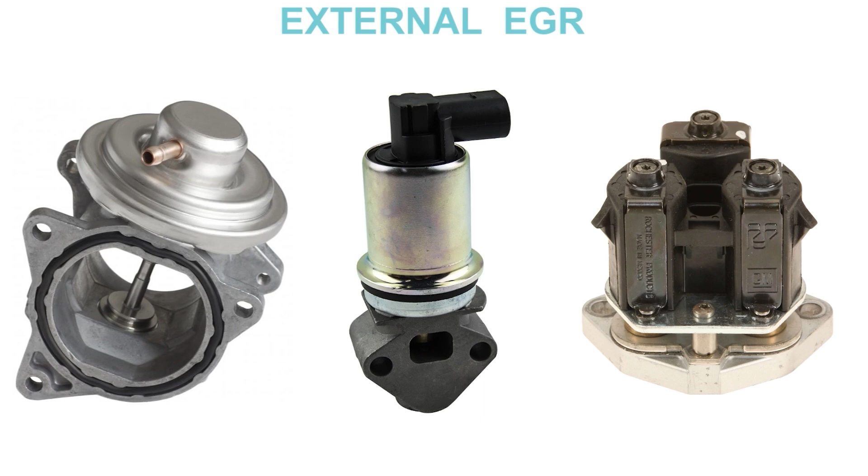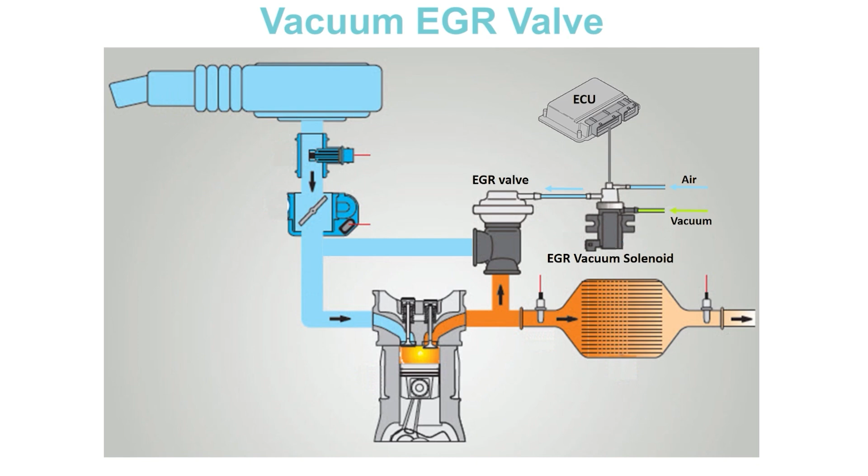There are three different types of external EGR systems. The oldest type is a vacuum-controlled EGR. It consists of a vacuum valve and an electromagnetic valve. The engine control unit of the engine, through the electromagnetic valve, controls the operation of the vacuum valve, which opens

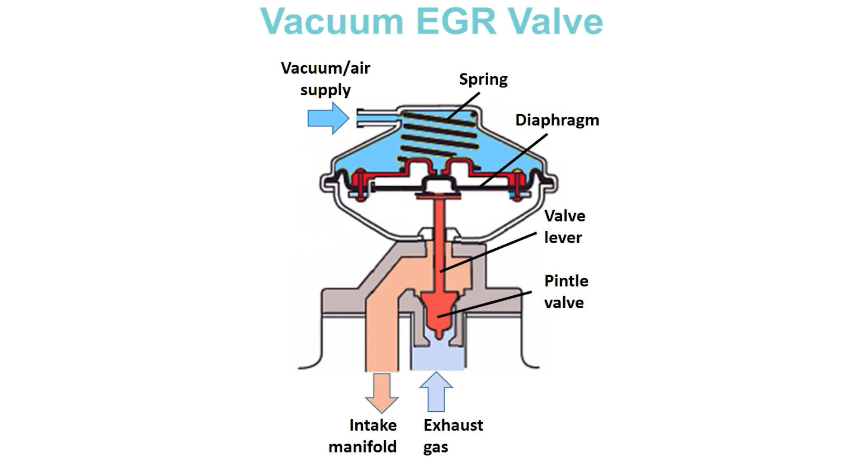and closes the exhaust gas flow into the intake manifold. The vacuum-controlled EGR valve contains a membrane that separates two chambers. If necessary, a vacuum or external air is supplied to one chamber from the electromagnetic valve, which acts on the diaphragm together with the spring. A valve lever is attached to the other end of the diaphragm. At the lever end is a pintle valve for closing the exhaust gas recirculation channel.

When there is outside air in the upper chamber, it together with the spring pushes the diaphragm and closes the EGR valve. By creating the conditions for the EGR valve to open, the engine control unit supplies voltage to the solenoid valve, which is switched to the position to pass the vacuum. A vacuum enters the upper chamber instead of outside air. Due to the weaker pressure, the diaphragm rises and opens the valve for the exhaust gas flow.

When the conditions for exhaust gas recirculation are disrupted, the engine control unit power supply is cut off. The solenoid valve switch closes the vacuum supply and allows outside air into the vacuum valve. Pressure rises in the upper chamber. Higher air pressure pushes the diaphragm and closes the valve, stopping the exhaust gas flow to the intake manifold.

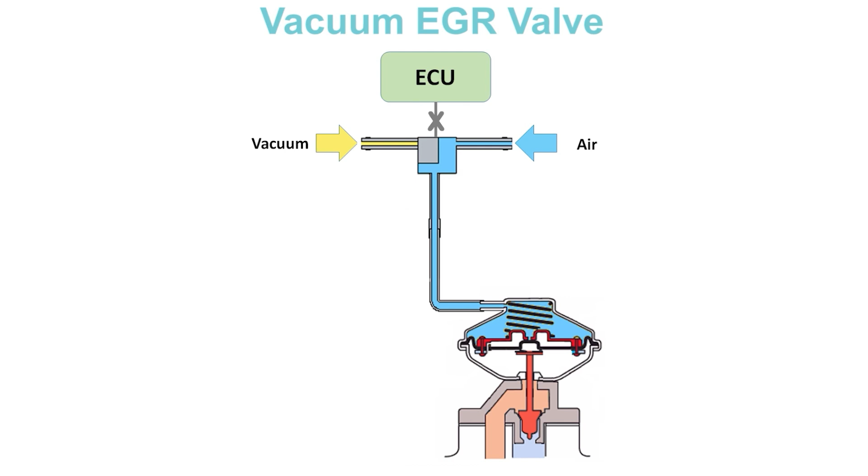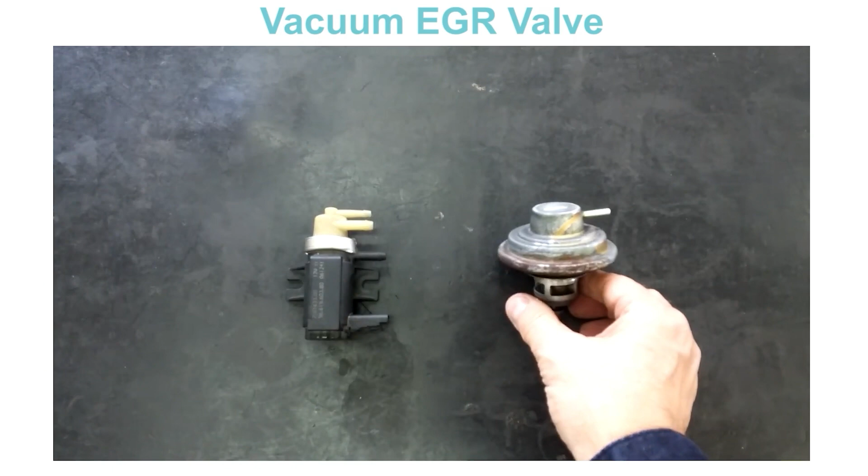So, when a vacuum is supplied from the solenoid valve, the EGR valve is open and we have exhaust gas recirculation. When outside air is supplied, the EGR valve is closed, and we have no exhaust gas flow into the engine intake manifold. The disadvantage of the vacuum EGR valve is that it only has two states, open and closed. Thus, there is no possibility of regulating the exhaust gas flow between these two states.

Another type is electric, linear EGR valves. They can regulate the amount of exhaust gas, making them more suitable for more precise and comprehensive recirculation control. It is a single device that contains an electric drive and a valve. There are two types, electromagnetic and with a stepper motor.

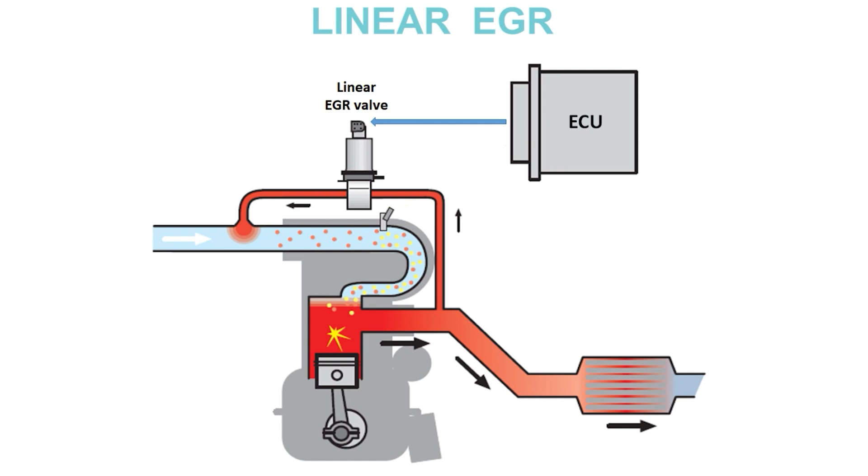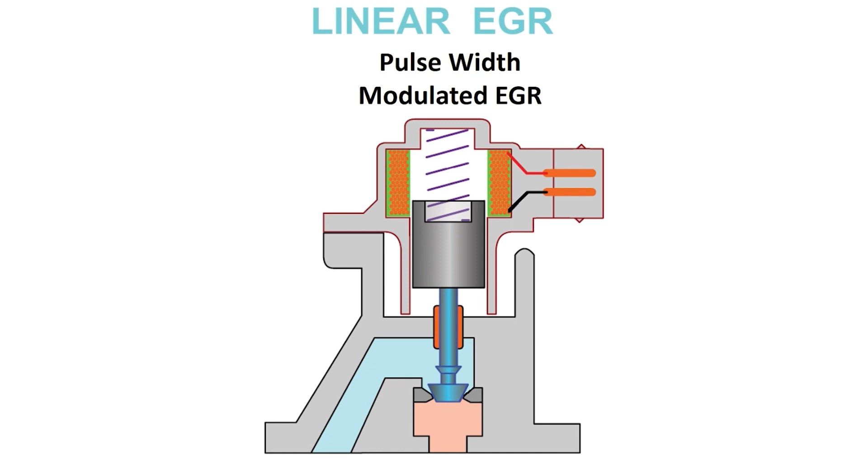With the electromagnetic EGR valve, a spring closes the valve. The valve armature is outside the electromagnet. When power is applied to the coils of the electromagnet, a strong magnetic field is created inside the solenoid coil that pulls in the armature, compressing the spring. Then the EGR valve is open.

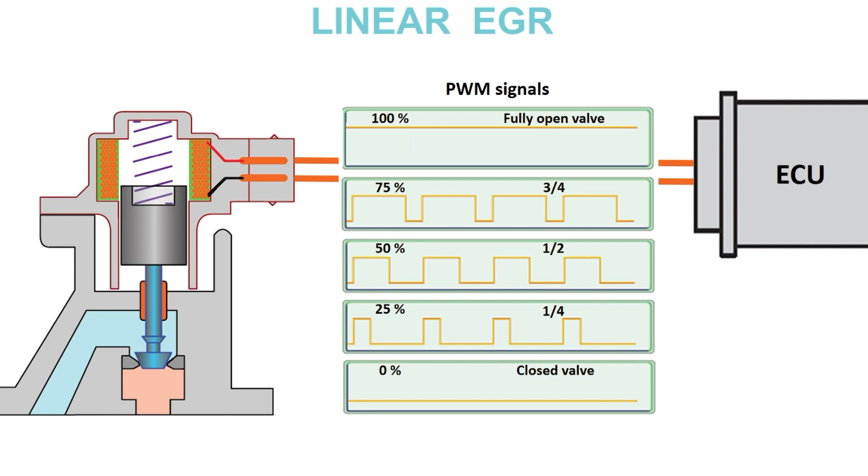The solenoid valve is powered by PWM signals from the engine control unit via a 2-pin connector. The longer the opening period of the PWM signal, the stronger the magnetic field and the more the valve opens. When there is no power, the spring closes the EGR valve.

With the second type of linear EGR valve, positioning is done using a stepper motor. The valve opening is in steps. The stepper motor is powered from the engine control unit via a 3-pin connector. Depending on the combination of the power supply of the different coils, the electric motor rotates and takes an appropriate position. By rotating the armature, the valve opens and closes in steps.

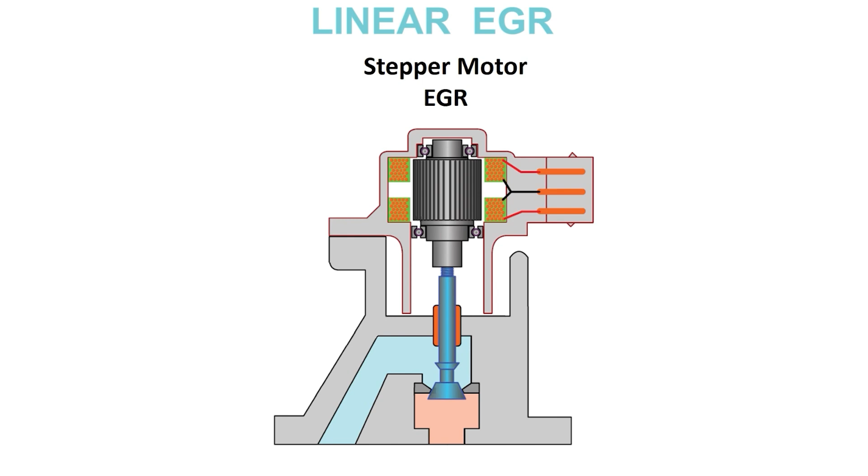With the first EGR valves, the engine control unit had no feedback on whether exhaust gas recirculation had occurred. Service technicians often close the return line, and no matter that the ECU opens the EGR valve, there is no exhaust gas flow. That is why the legal regulations were tightened, which required control of the correctness of the EGR system by the engine control unit.

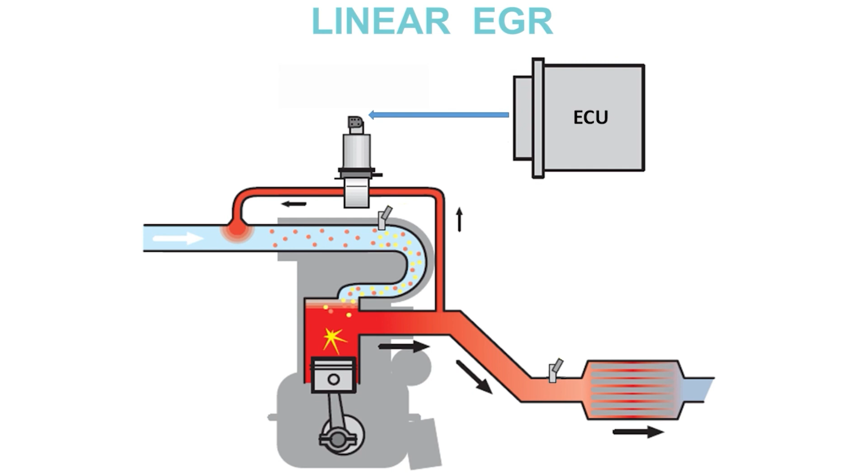Manufacturers have solved this requirement by adding control functions of pressure analysis in the intake line through the MAP sensor, analyzing the signal from the oxygen sensor, and installing a valve position sensor in the EGR. Now the ECU can control the correct operation of the EGR valve and the performed exhaust gas recirculation.

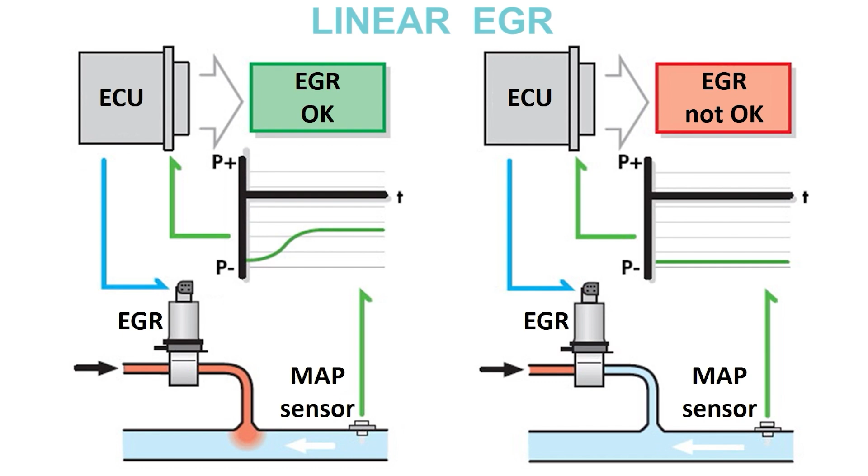The ECU detects any blockage, disconnection, or failure of the EGR system. It stores an error code, turns on the malfunction indicator lamp, and the engine runs with a limited maximum number of revolutions because the exhaust gas emission is increased. This limited engine function allows the driver to take the vehicle to a car repair shop.

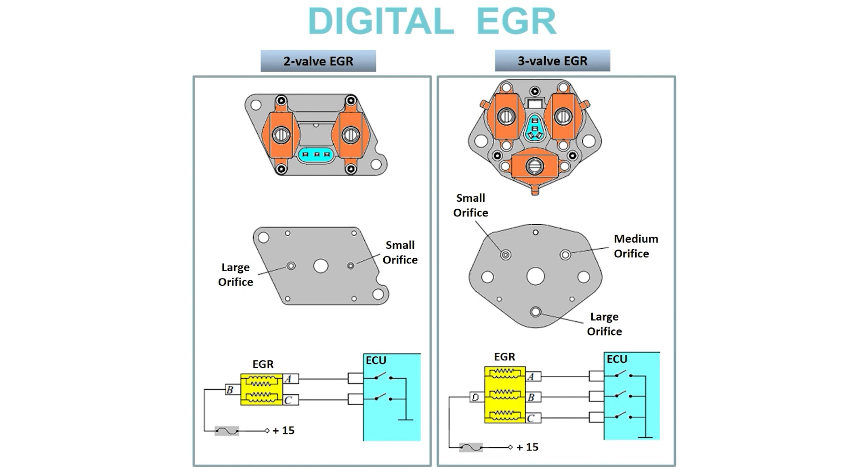Some vehicles also have a digital type of EGR valve. It consists of 2 or 3 electromagnetic valves that control the opening of openings of different sizes. The engine control unit controls the opening of each solenoid valve individually. When a solenoid is energized, its plunger is lifted, and exhaust gas can recirculate through the orifice into the intake manifold. The computer controls the total amount of exhaust gas through the valve opening combination.

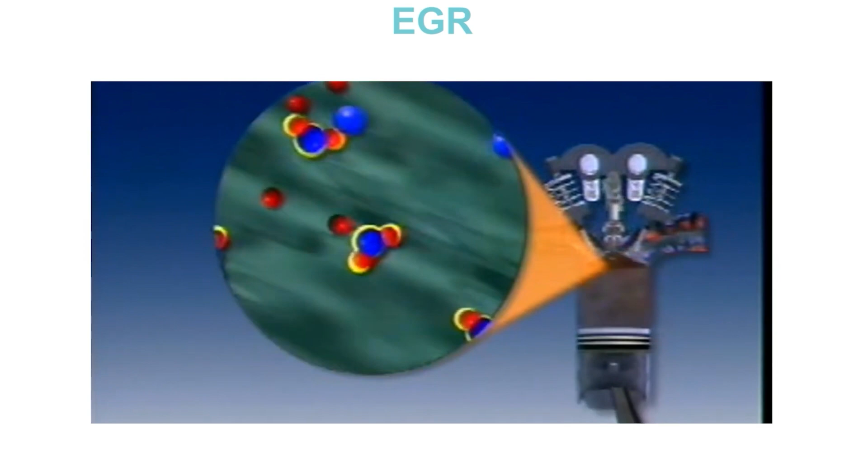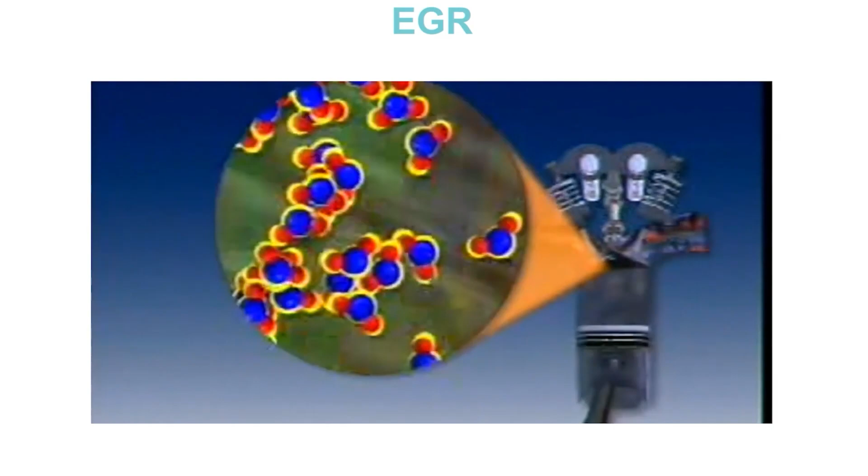The question arises whether the EGR valve is necessary for an internal combustion engine because it works normally without it. The EGR valve was introduced to reduce the concentration of nitrogen oxides in the exhaust gases as a dangerous component that leads to health problems and causes cancer of the respiratory organs.

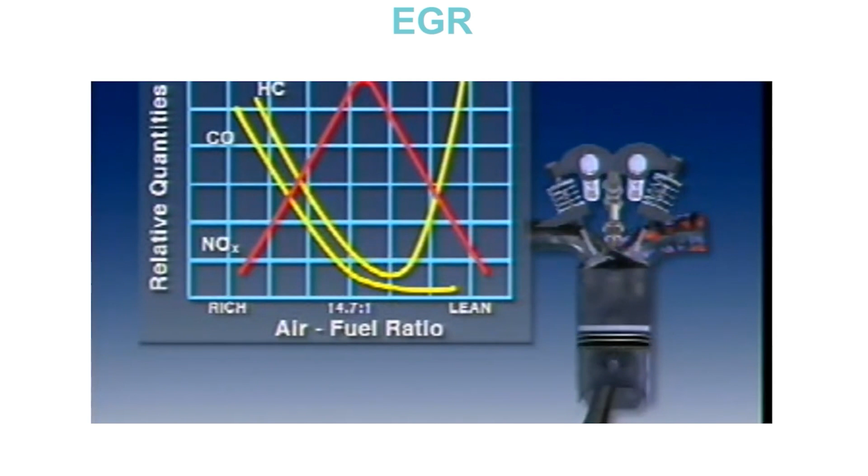In addition, in a partial load state, it lowers the engine temperature and reduces fuel consumption. Finally, EGR is required to comply with the legal norms on exhaust emissions. Driving with a faulty EGR valve is punishable. That's why EGR is necessary for ourselves and the people in our environment.